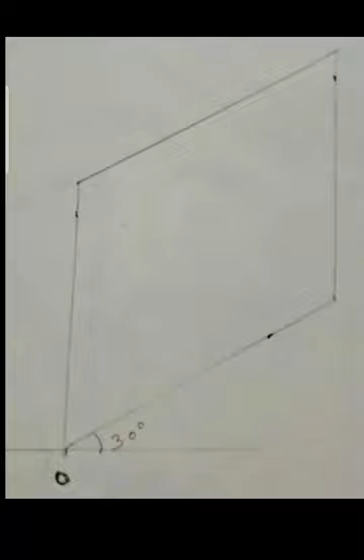So here I have taken only one plane. On the right hand side I have taken the 30-degree angle, taken the length as 70 mm, height as 60 mm, and I have completed this particular box. Suppose my requirement is that I want to draw the isometric arc at point A and at point B of radius 20 mm. Requirement is an isometric arc of radius 20.

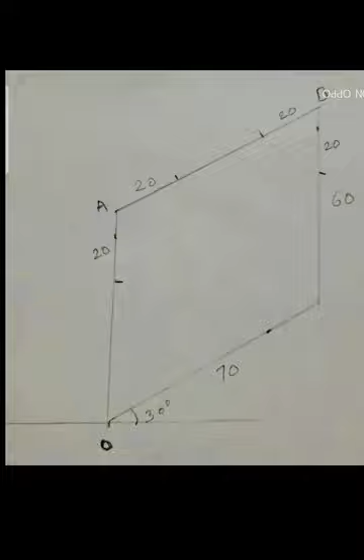Fine, what I have to do here: from point A take 20 mm on the right hand side and 20 mm below point A. From point B take 20 mm on the left hand side and 20 mm below point B. We are taking 20 distance here because the arc is of radius 20 mm. That's why we have taken the 20 distance here. Fine. Next.

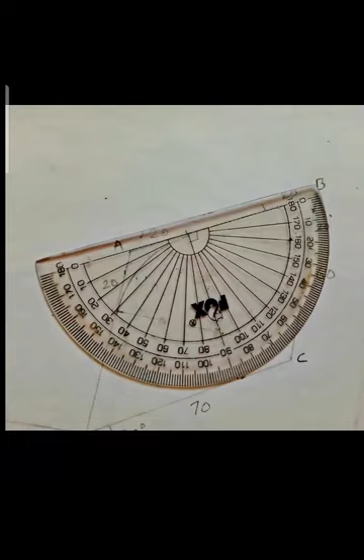Keep the protractor on that particular 20 mm point and mark the 90 degree here like this. Make sure that the protractor line is parallel to the line AB. The point should be that 20 mm point. Second thing, the protractor line should be on that line AB.

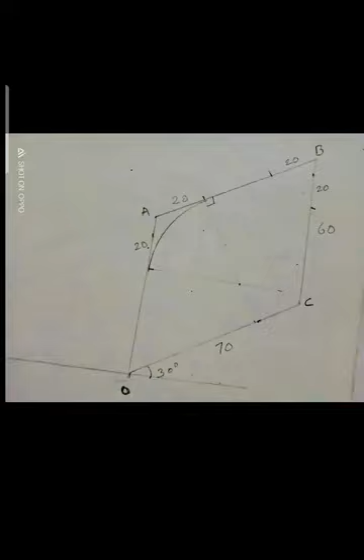Fine. Next, from the point below A, keep the protractor point there and keep the protractor line on that particular line AO and mark the 90 degree line here. Fine. Now see here, this is point P1. That is the intersection of the 90 degree line drawn from the 20 mm point on the right hand side of A and the 20 mm point below A.

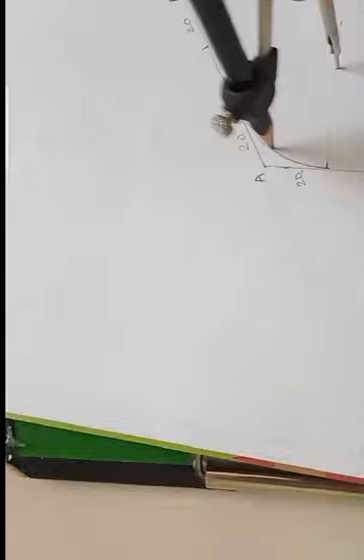Fine. Now simply keep the compass set there and draw the arc. That will give the isometric arc of radius 20 mm. Fine.

Next thing, in the same way, on point B you have to follow the same procedure. Draw the 90 degree on both sides, mark the intersecting point, and complete the simple arc like this. That is point P2, and you have to complete the arc like this. Fine. So this will give the isometric arc here.

See here. So what is point P1? Point P1 is the point of intersection of the lines drawn from the two 20 mm points. Fine. What is point P2? It is a point where I have marked 90 degrees here. That is 90 degrees to the line AB, not to the horizontal. Make sure, because here we are dealing with the planes only. We are not dealing with the horizontal lines here.

So what is point P2? P2 is the intersection point of the 90 degree lines drawn from that particular point and the AB line. Fine. And you have to draw the symbol. This is called the isometric arc.